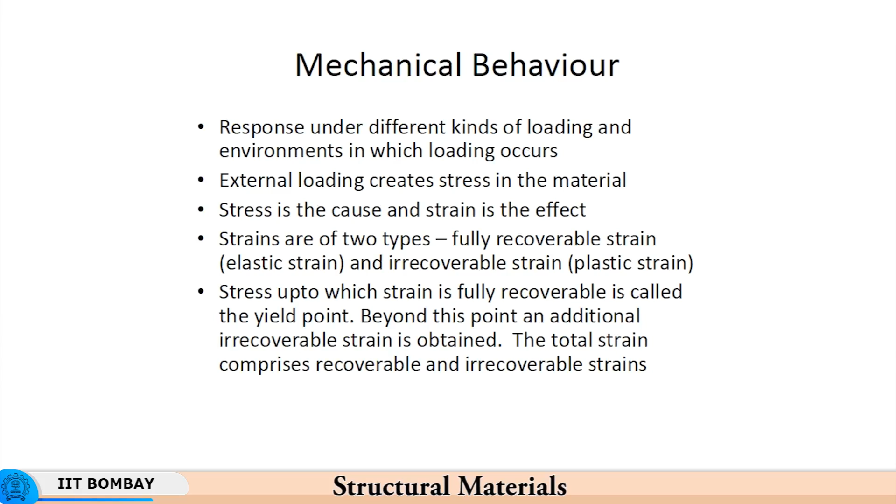So the stress up to which the strain is fully recoverable is called the yield point. We will see how we determine the yield point in case of structural materials, and beyond this point an additional irrecoverable strain is obtained. So the total strain is a sum of recoverable strain plus irrecoverable strain. Recoverable strain is called elastic strain, irrecoverable strain is called plastic strain. Therefore, the strain is the total sum of elastic strain and plastic strain.

So you have tan theta as the shear strain experienced under a certain amount of force. When theta is equal to 0, the shear strain is 0, and when you generate some angle theta, the shear strain increases in proportion to the angle theta.

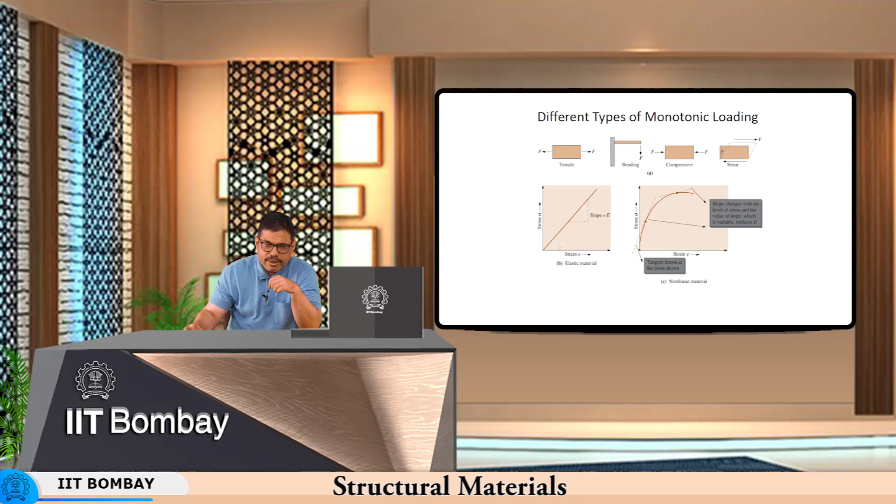Now if you look at the elastic regime, you have an absolutely linear relationship between stress and strain. That is called the Hooke's law region, because Hooke's law postulates a linear relationship between stress and strain, and that happens because the interatomic distances increase under load, and when you release the load, the atoms are restored to their stable equilibrium positions. That is what generates the elastic strain, and that is the outcome of this.

So you take the slope of this line, stress versus strain, and then you get the modulus of elasticity. When we looked at the interatomic distance, how it is determined through the interpotential curves, we said that the radius of curvature at the trough of the interpotential curve is proportional to the Young's modulus. So the curvature, not the radius of curvature, the curvature at the bottom. If the curvature is very sharp, the Young's modulus is very high. The smaller the radius of curvature, the greater the Young's modulus.

So the interatomic arrangement has a very significant effect on the observed Young's modulus. If you take steel for instance, irrespective of the variation in chemical composition, as long as it is a ferrous, iron-based alloy, the Young's modulus does not vary too much. It remains practically constant. So the difference between the Young's moduli of aluminum and steel is because of the equilibrium distance between the two atoms, and the shape of the interpotential curve that is responsible for many of the observed properties, as we have seen in many of the previous lectures.

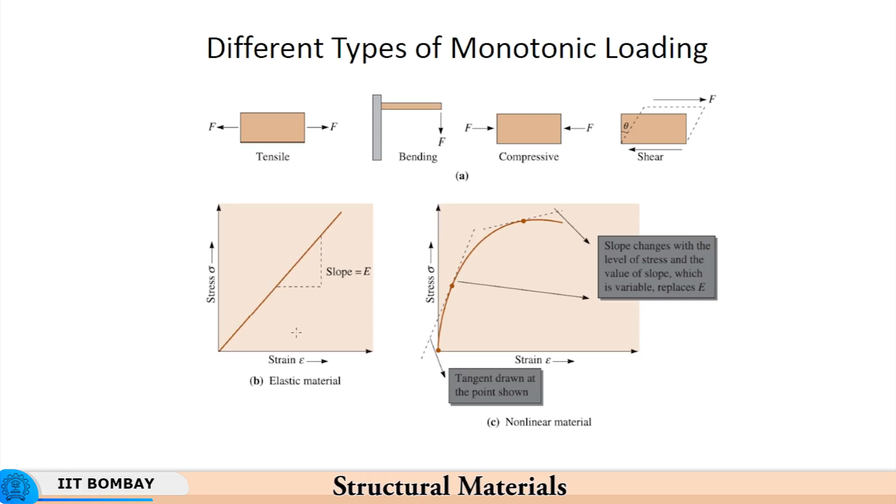But in most metals we have this type of situation: the response of the material is linear up to a point, and then it becomes non-linear once it gets into the plastic deformation range. So we look at this, where different materials respond differently. It is no surprise that different materials will respond differently to the same stimulus.

That is what I am trying to explain to you, and that is because of the arrangement of atoms, either in the form of different crystal lattices, or because of different interpotential curves, the nature and shape of the interpotential curve, and the arrangement of atoms in terms of polymeric chains in case of polymers. There are various reasons which go into the atomic arrangement, or basically the interatomic forces, interatomic distance, and the electronic configuration of the atoms, which are the root cause for the different behavior in the material.

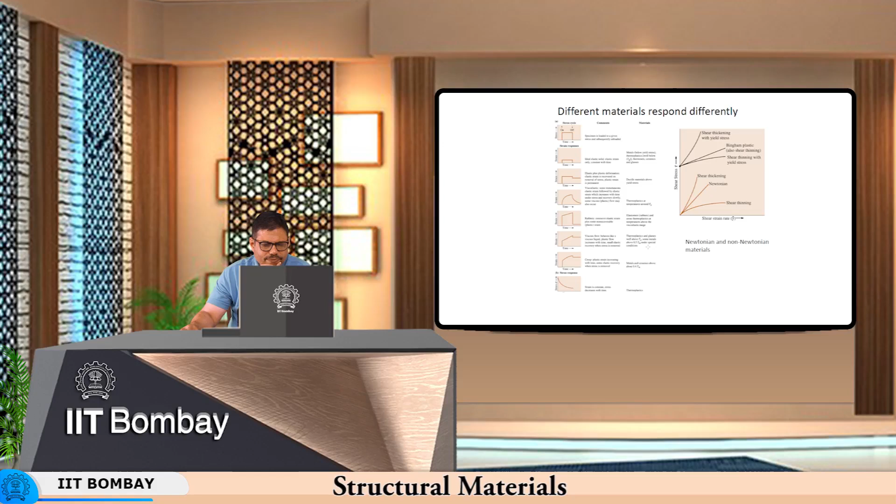And then you have another kind of response. So we have seen a number of responses for different kinds of materials. This creep response is typically with metals and ceramics above 40% of the melting temperature. At about 50% of the melting temperature, you have some thermoplastics and glasses above glass transition temperature, and some metals about half of the melting temperature show this kind of behavior.

Both these behaviors are very similar to creep type of behavior, because viscous flow is again a part of the creep deformation. Creep deformation does involve viscous effects. And when you talk about rubbery behavior, it is typical of elastomers or rubbers, and thermoplastics at temperatures above the viscoelastic range. So if the temperature is above viscoelastic range, then this is the kind of deformation you see.

Now if you look at polymers, you have different kinds of polymers. One is shear thickening with yield stress, so the material becomes more viscous. As you increase the shear rate, the viscosity of the material increases. Normally with Newtonian fluids like water, if you stir it, the shear rate increases, but still viscosity remains the same, it remains unchanged.

So the shear rate and viscosity are linked in that a higher shear rate would cause shear thickening in one type of material and shear thinning in another type. Typically polymers, thermoplastics which we use for injection molding for instance, show this shear thinning behavior, because as shear rate increases, the viscosity continues to decrease, whereas with Newtonian fluids the viscosity remains constant. As you see shear stress with strain rate, in Newtonian fluids viscosity is constant, which is also the slope of this curve. Here the viscosity keeps on changing, and finally this becomes horizontal, meaning the viscosity is decreasing. So the slope continues to decrease, indicating shear thinning as a response to increasing shear rate.

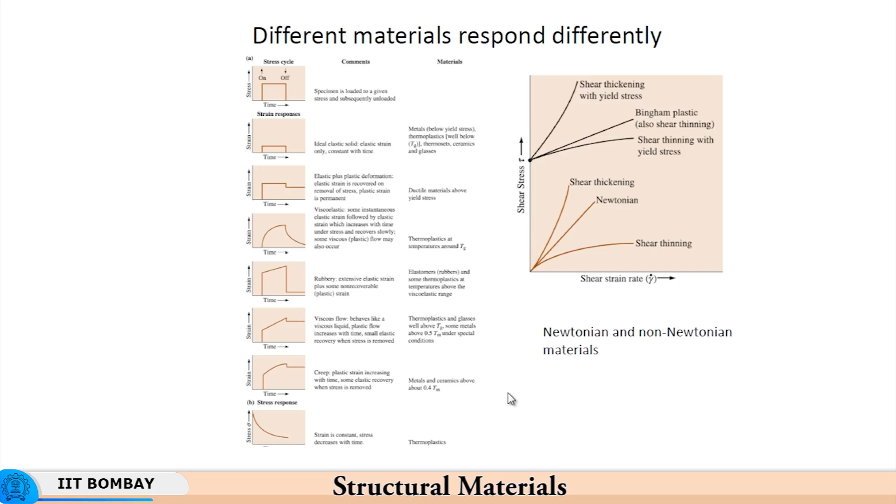So this is what different materials do when you subject them to different kinds of stress. For a given stress cycle or stressing history, the strain history depends upon the kind of material, the temperature that it sees, and so on.

Ceramics are oxides and oxide nitrides of different metals, or they are glass, concrete. These ceramics are the ones which have very limited ductility. They have ductility at high temperatures. Glass, for example, melts at high temperature and has extremely high ductility at high temperature, but at room temperature it is extremely brittle.

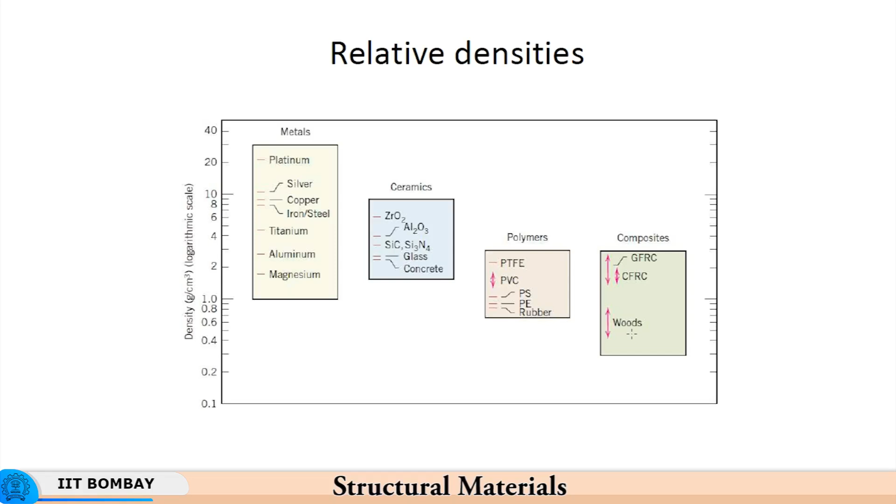If you do not use an extensometer and rely on the crosshead movement to evaluate the strain or the deformation in the material, then the compliance of the machine becomes a factor. When you deform the material, the force also acts on the machine frame, and under that force the machine frame also deforms. So the elongation measured will be partly the genuine elongation of the sample and partly the deformation of the machine frame. If you want to exclusively read the deformation of the sample itself, it is important to have an extensometer, because that will read only the deformation of the sample. Many times tests are done without an extensometer, taking the crosshead movement as the extent of deformation, but then that involves this error of machine compliance.

If you want accurate measurements of strain, then an extensometer is required, and one is able to get extensometers which work even at high temperatures. So even if one is conducting a test at high temperatures, an extensometer which will withstand that high temperature is available. Of course, they are expensive, but such instruments are available.

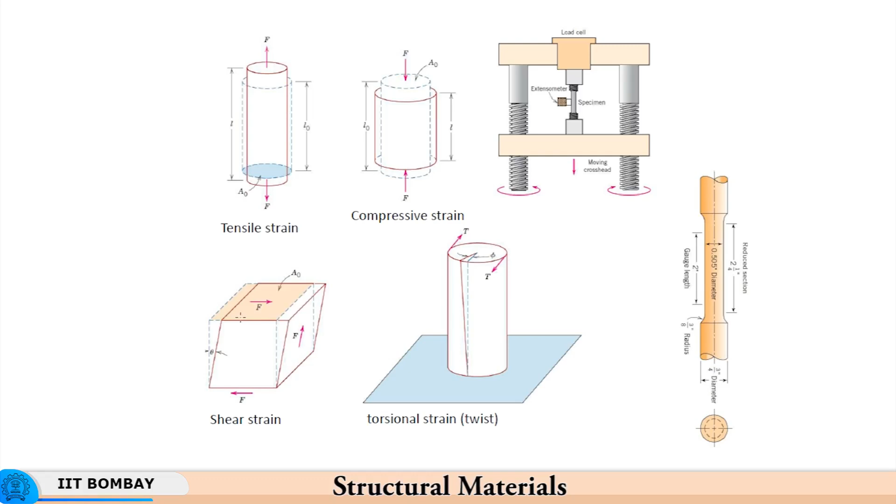Then you have torsional stress and strain. The torsional stress is due to the force being applied across this diameter, and the corresponding strain is the angle phi determined at one end. If you look at the torsional strain or twist, at this point there is zero twist, and as you go to the other end, the free end of the cylinder, the torsional strain continues to increase. So for torsional strain, there is a gradient of strain from bottom towards the top, whereas in the tensile case the strain is uniform over the entire length. Here, the shear strain is in the form of an angle, and that is also uniform.

If you look at the quantities that quantify the mechanical behavior, the stresses and strains, we have what is called engineering stress and engineering strain, and true stress and true strain. We were talking about force per unit initial area, and that is the definition of engineering stress given here. This is shear stress, force divided by area. Here you have engineering stress, force divided by initial area.

Now, in elasticity, the cross sectional area A naught remains unchanged, and therefore engineering stress and what we call true stress are identical. What is true stress? True stress is load per unit instantaneous area. What is the difference between initial area and instantaneous area? This difference is very significant in plastic deformation, because the volume of the deforming material in plastic deformation remains constant. Unlike elastic deformation, where the volume of the deforming material can increase or decrease depending on whether it is tension or compression, in plastic deformation the volume of the deforming material remains exactly constant.

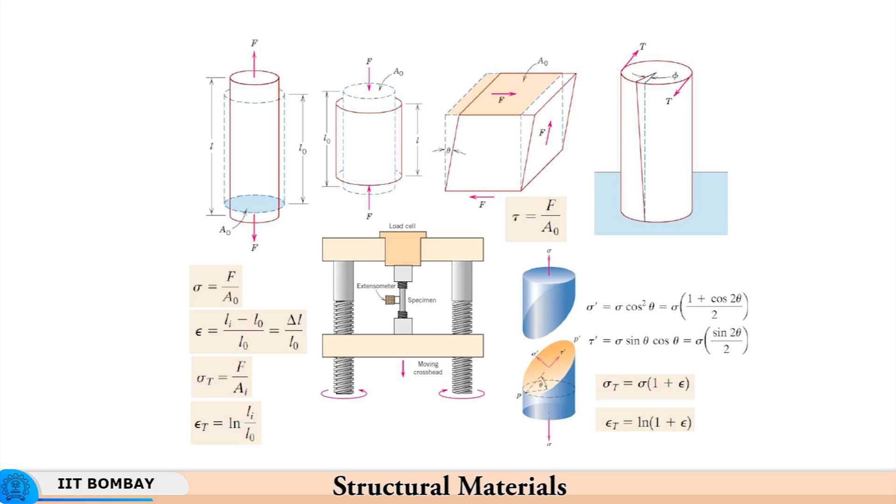So you would like to make sure that the structure does not fail because the structure is weak under shear. So you need to find out what is the maximum shear stress acting, the direction of maximum shear stress, and make sure that the material is strong enough in shear and is able to withstand the shear stress on that particular shear plane. So this is what is shown over here.

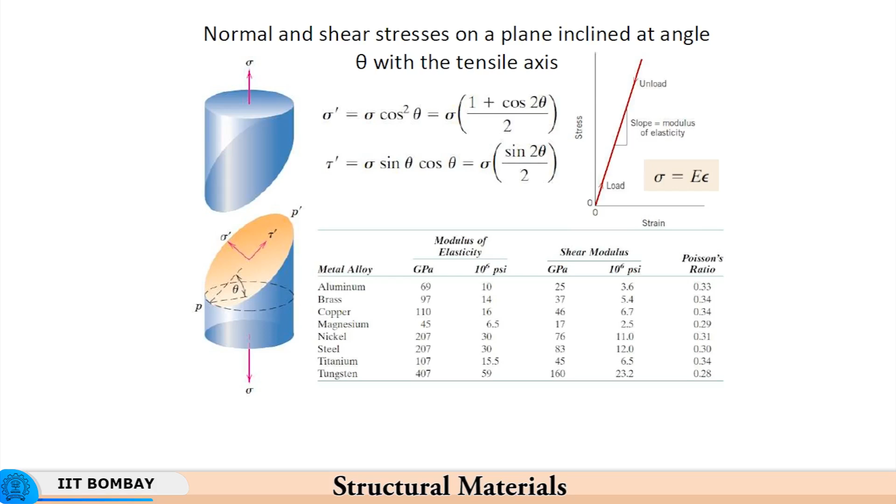So you have different moduli of elasticity and shear modulus, particularly in shear loading here. The modulus of elasticity and shear modulus are related in terms of the Poisson's ratio.

Now we therefore examine the features of the response of the material subjected to uniaxial tension. We were talking about a material being subjected to monotonic loading, uniaxial tension. So first is the linear response in terms of elastic deformation.

So delta sigma by delta epsilon is equal to the Young's modulus, and at some point there is a transition from elasticity to plasticity, but then this is not the yield point. What we have seen is, although there is a transition from here to something else, this is the elastic limit but not the yield point. So what is the yield point?

Yield point is the one where there is a permanent set of 0.2%. So 0.2% proof stress is taken as the yield point of the material. So if you draw a line parallel to this Hooke's law region, parallel to the elastic modulus line, then at 0.2% strain, wherever this line intersects the curve, that is your yield point. So what is this?

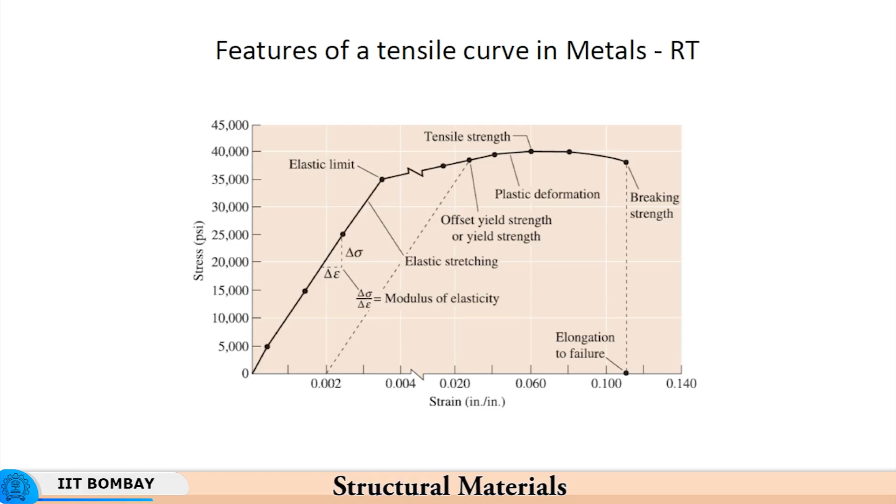So ideally speaking, you should not have this, and there are ways and means. Basically people give skin pass rolling or a small reduction in cold rolling to address this issue, so that this disappears. So if you do get this kind of phenomenon in the material, you need to give a very small 5% thickness reduction to that material, or 5% strain, by rolling, so that this phenomenon disappears.

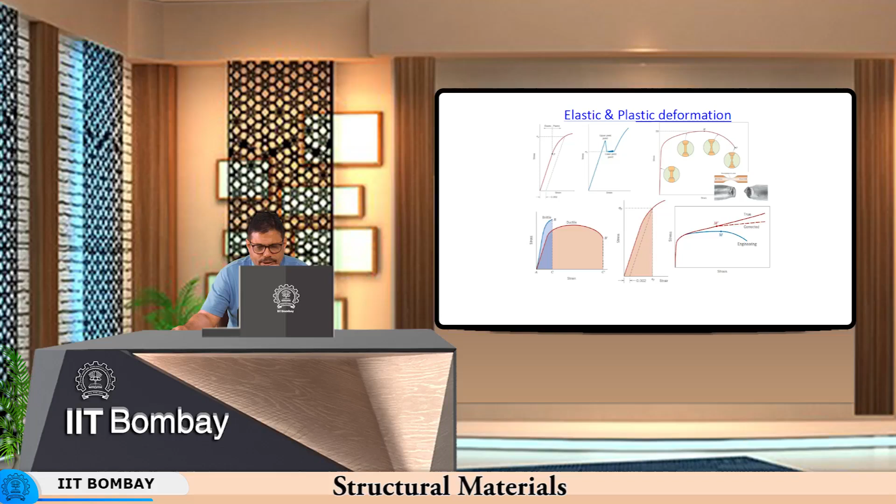We will see them a little later, but you have what is called cup and cone fracture, where the central portion looks fibrous and the peripheral portion, called the shear lip, is relatively bright. So you have two distinct regions: one is the fibrous zone, and the other is the shear lip.

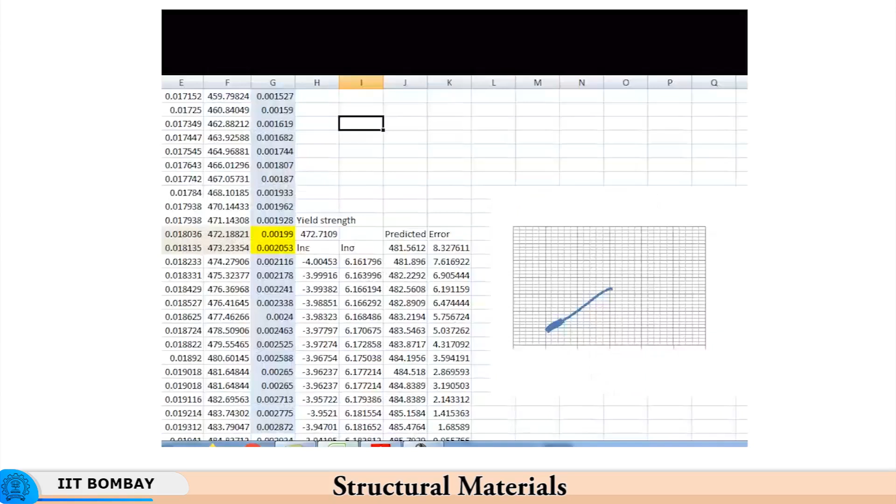Now I will show you how to determine the yield point, because we have said that 0.2% proof stress is the point at which yielding takes place, where the material transitions from elastic to plastic. What we get from a tensile testing machine is the load extension curve.

So load extension data is what we get. You have positions, the initial position is 0 with no strain, and initial stress is also 0 because there is no deformation. So you have engineering strain, engineering stress, true stress, and true strain. As the position increases, as the deformation increases, this coordinate increases, which means the length of the sample is increasing, and so is the stress.

If you look at this entire curve of stress versus strain, you have this fairly linear region, and this is the point which can be seen as the yield point. You can mark it by judgment or intuition, but how do you do it unequivocally, because different people might mark the point at different locations, and the scale is also very cramped and compressed. So there can be significant errors and differences between the judgments of two individuals trying to identify the yield point.

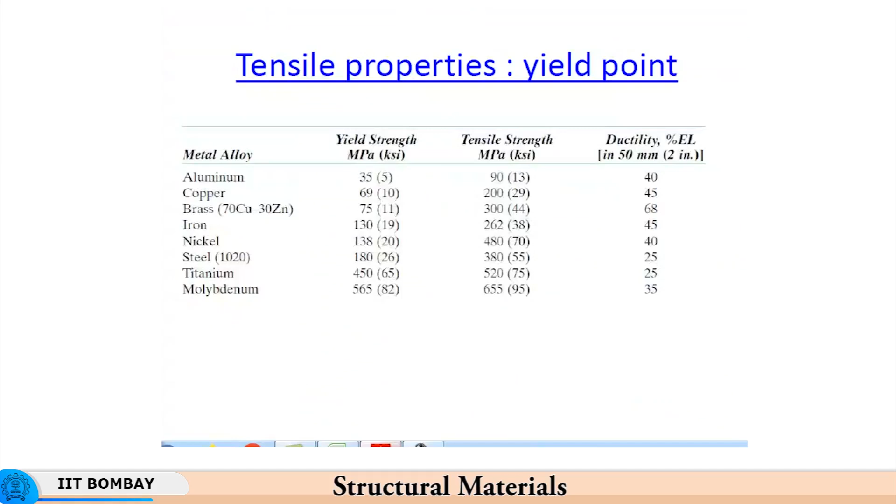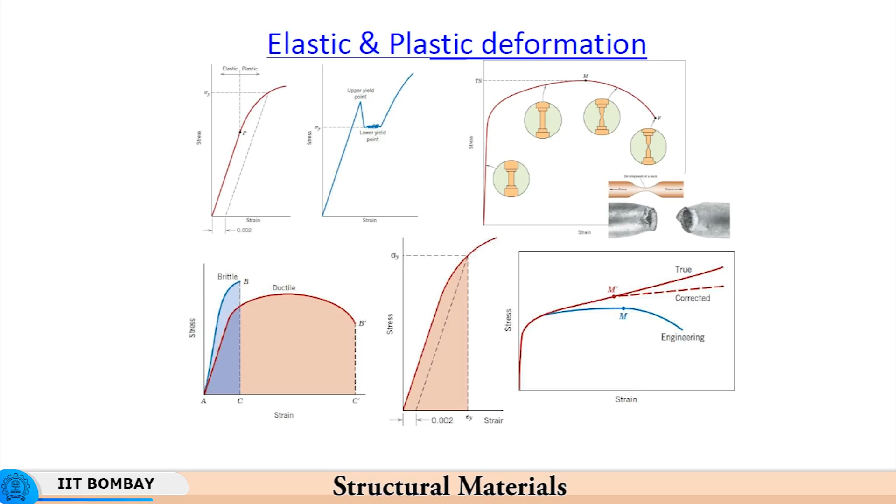Therefore we plot a parameter of epsilon minus sigma by E. What this essentially means is that, in terms of the recoverable elastic deformation shown earlier, we are trying to find this quantity. Epsilon is the overall strain, from here to there, and sigma by E is the recoverable elastic strain, from here to there. So we are trying to subtract sigma by E, the recovered elastic strain, from the overall strain epsilon, and what is left behind should be 0.2%, or 0.002.

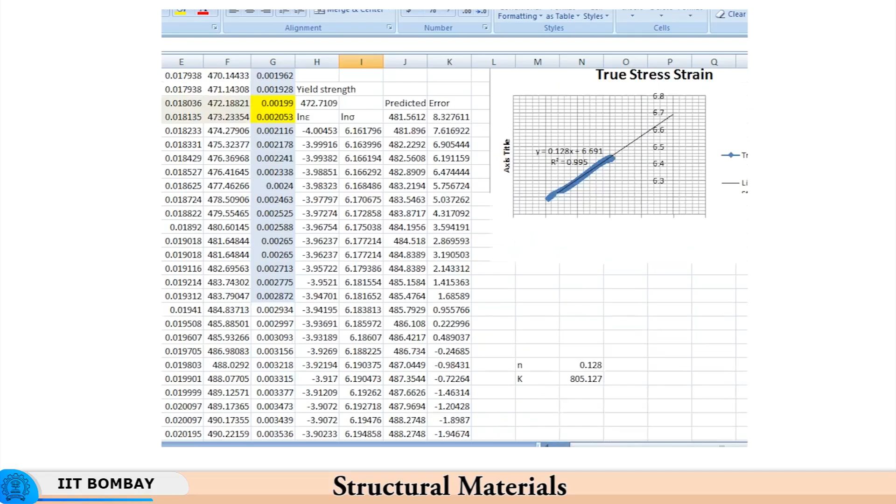So when this parameter reaches the value of 0.002, you call that the yield strength of the material. Here it is 0.00199, so not exactly 0.002, and here it is slightly over 0.002. So you interpolate between these two values of stress, 472.18 and 473.23, to get the yield strength of 472.71 MPa.

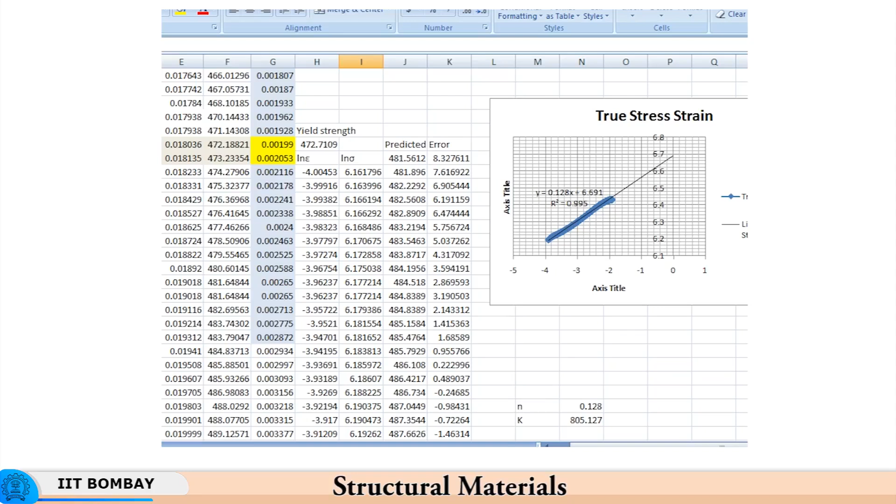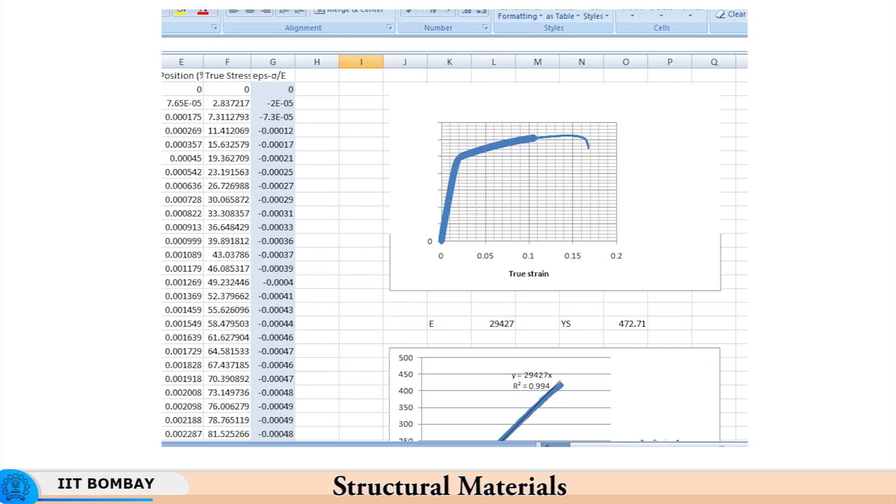You determine the yield point based on the fact that up to this point it is all linear in nature. So what you do is correlate stress with strain and determine the Young's modulus first. You need to take points such that they lie on a straight line, so when you fit a straight line through this stress-strain relationship, R square has to be practically 1, and this is very important.

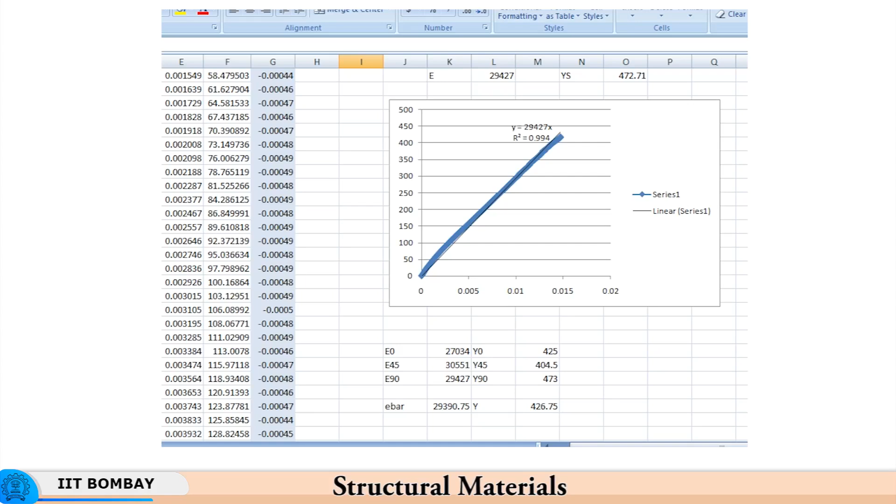You will see that the Young's moduli differ in different directions with respect to rolling - if you have rolling direction, transverse direction, and direction of 45 degrees. So the yield strength changes, and the Young's modulus also changes. The properties of the material differ between the rolling direction, transverse direction, and the direction of 45 degrees. This shows a directional dependence of the Young's modulus and the yield strength, and you therefore calculate the average value.

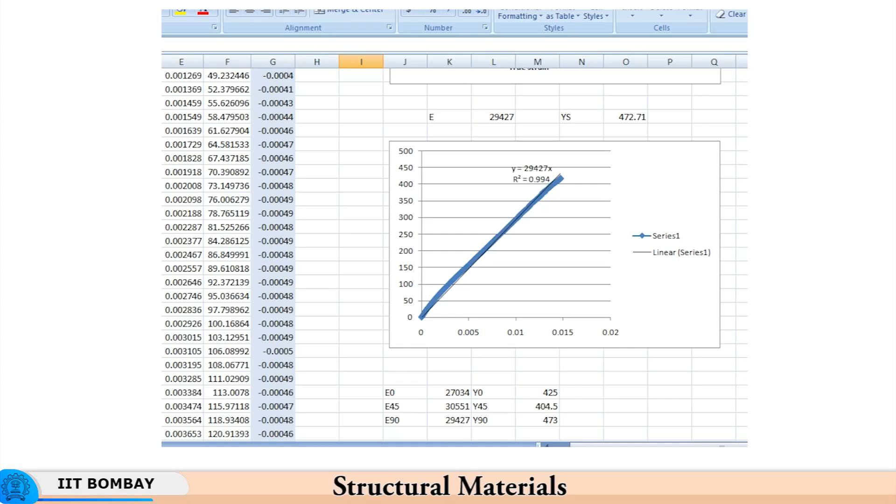Now this Young's modulus has not, I think, been calculated using an extensometer - it comes out to 29427 MPa as the Young's modulus. You can get accurate values once the measurements of the elastic strains are made using an extensometer.

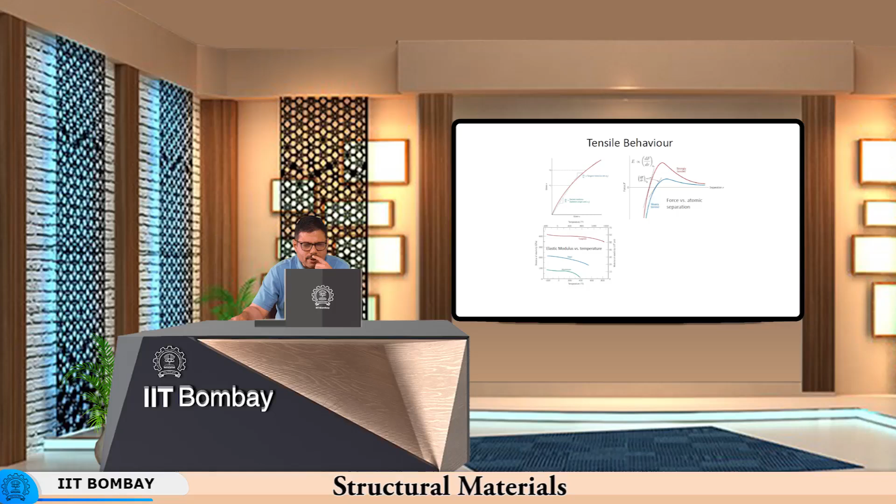So we have seen some quantities which we can determine using the tensile test, how we determine the yield point and the Young's modulus, and now we will go on to further discussion on some calculations pertaining to elastic and plastic deformation in the subsequent class. We will try to solve a few problems in the subsequent class, so that we get a feel for handling the mechanical properties of the material. Thank you.